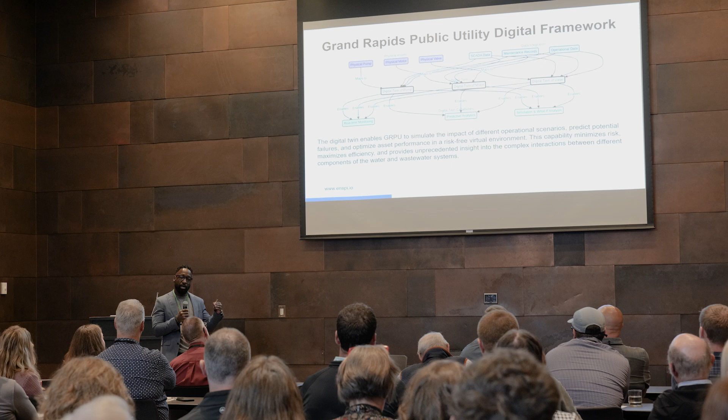So to talk about the opportunity that Grid Catalyst has provided us in piloting with Grand Rapids: the objective of the pilot is to really digitize their water and wastewater operations. They would like to run simulations in a virtual environment without interfering with their physical and live environments.

So our pilot is right now going through all of their different control systems. Through integrating those different control systems and putting that within our platform, it allows us to start analyzing their information to understand where they can reduce costs, how they can reach operational excellence, and how they can actually focus on using data effectively in the future.

One of the big challenges across utilities and municipalities is the ability to actually integrate and collect this data. As we all know, there's no uniformity when it comes to these systems, especially a lot of these hard assets. Another thing is air-gapped environments.

So we've been able to get around that using multiple different techniques - one-way diodes where information is coming only one way out, deploying on-site historians that provide access for the organization to get that data in a secure way. A lot of our customers aren't looking at moving into cloud, so we really focus on integrating into SCADA systems. That is how we've been able to go around that rip and replace model, and that is what we're essentially doing with Grand Rapids here.

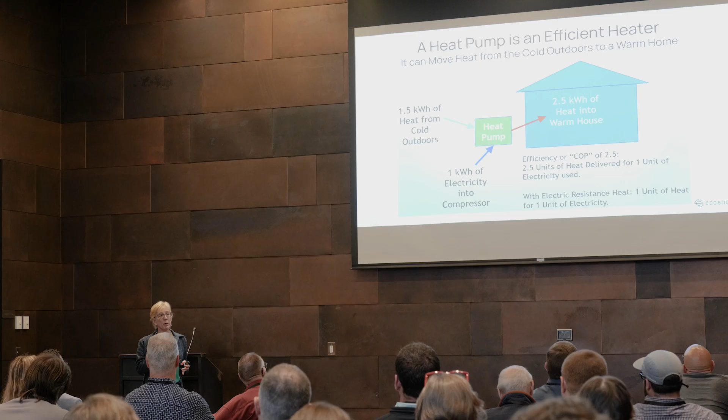The technology we're talking about today is air source heat pump, air to air. And I'm also talking about single zone ductless mini-split heat pumps. How many people know what that is?

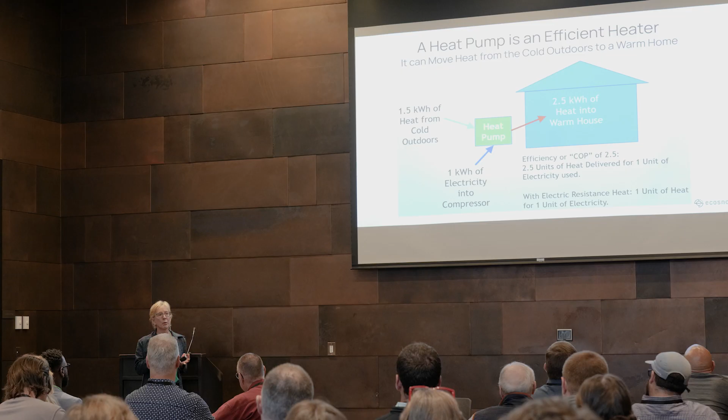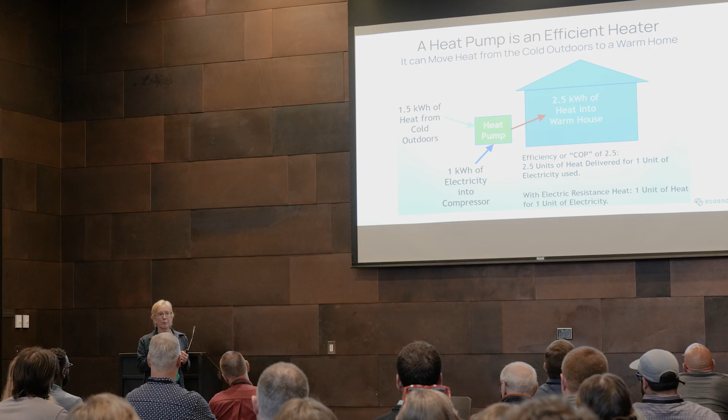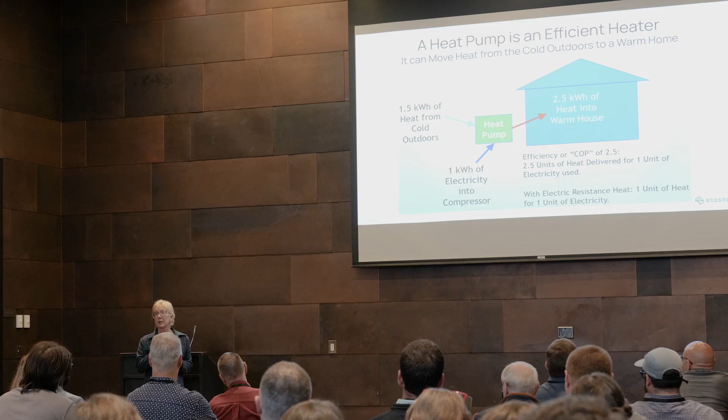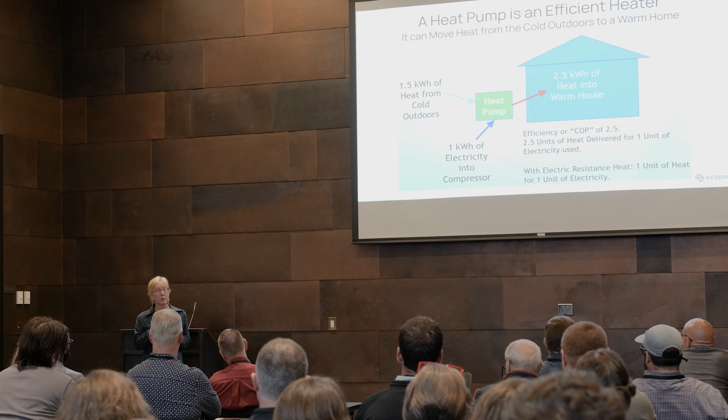So air to air, the source of the heat is the air outside, and it's delivering to a single point of delivery of heat and cold. You all know heat pumps can heat and cool as well. The other special thing that makes it important for Minnesota is in the last 10 years, the technology for residential heat pumps has dramatically improved, such that inverter-driven compressors can operate very efficiently down to really low temperatures. Ecosnap has done work with Fairbanks in Alaska with NREL and looked at performance all the way down to -20. Some Alaskans have looked at it, and the heat pumps don't even stop working down to -40 F. You might not like exactly what kind of performance you're getting at that level, maybe you're starting to draw more energy, but they will work, and they will work pretty efficiently down to some pretty cold temperatures. So that's all we're going to talk about heat pumps in general.

How do I change, Elizabeth? Is it this one? Is it this one? It's the arrow. Okay.

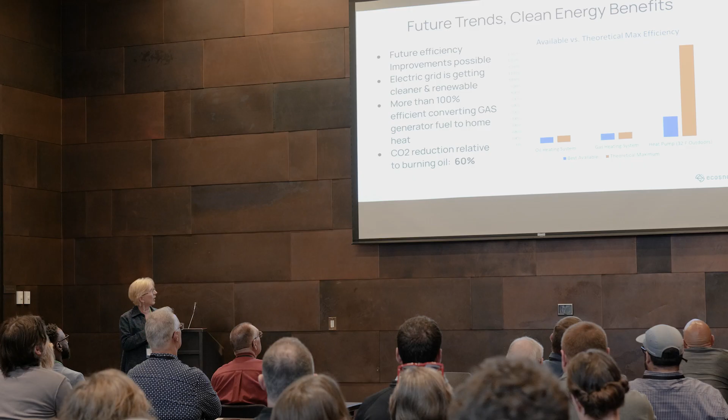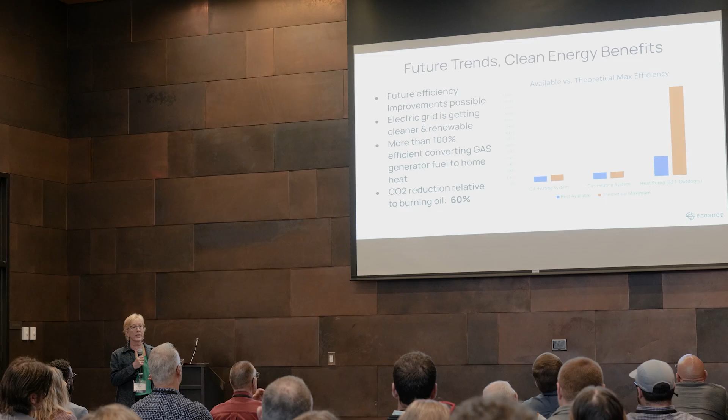This is always a startling look: we should not be burning gas or oil in our homes anymore for heating. The technologies exist. They're very mature for heating and then bonus cooling in most climates. And as Elizabeth pointed out, as the grid gets cleaner and cleaner, the emissions impact of using electric heating, and in particular heat pumps, gets better and better. So this is the right thing to do.

Now let me talk to you about Ecosnap. Ecosnap was born from my own anger. I asked for a quote from a local HVAC person for my home office for a mini split heat pump, and they said $8,000. This is in Colorado. And then I asked for a quote for a duplex I own, and someone said $10,000. And I said, you know, I'm just talking about one piece of equipment, right? And that's the reality in many parts of the country. So I dug into what's the problem.

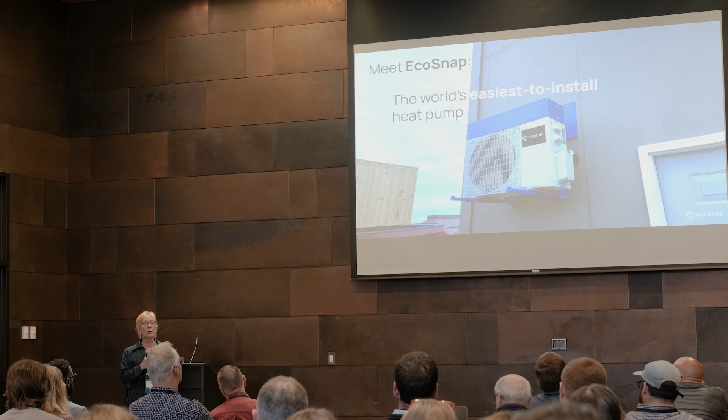And it's really very much a technical and a market problem. Market is uncomfortableness with new technology. But on top of that is that there's a complicated evacuation, charging, and line set running step to putting in a heat pump. And so we set out with clever engineering. We're not reinventing the wheel here, we're not doing rocket science. We're just employing clever engineering to remove some of those bottlenecks. And that's what EcoSnap is all about.

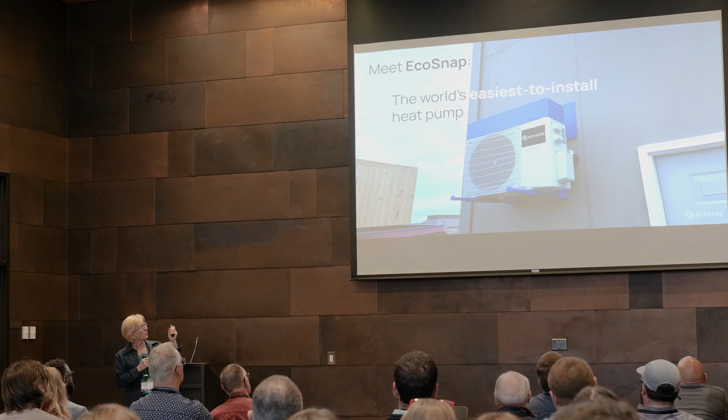There's one of our very early prototypes in partnership with Oak Ridge National Lab. The blue was my idea. Everybody wants gray, so I was overruled.

Here's what I just touched on: labor in the field counts for the vast majority of the price of a heat pump. And that's true for central heat pumps, and it's true for ductless mini splits. So I got to looking at that, and I created a stack chart, and I found out the evacuation and charge and running of line set, and we said, how can we tackle this? You can actually get a heat pump out of China for a number that would shock you all, and you would be upset to know that you can get a heat pump for like $250 out of China. So why does it cost me $8,000 when I go to get one in my office?

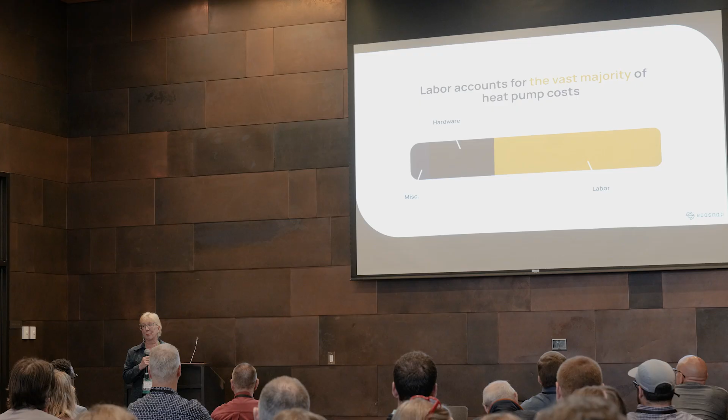So enter EcoSnap. We have a product that enables faster, more profitable installation, and this can benefit either the homeowner and the HVAC installer if they choose to use an HVAC installer. Faster, more reliable, and cheaper installations is what we enable. We reduce install time by 80%, based on compared to traditional install. Fewer callbacks because our system is more leak-proof, so you're not going to end up with climate-changing emissions going into the atmosphere, and in a more immediate sense, something that impacts the performance of the heat pump once it's in the homeowner's home. So there's more opportunities - potentially handymen can install these, or handy homeowners. The feature that I'm going to touch on in the next slide is we have also engineered it so that it will run on 115 volts, and so it would be plug-inable, so you can put it into an outlet on the inside. That's not the only embodiment of Ecosnap, but it's an important one for smaller homes.

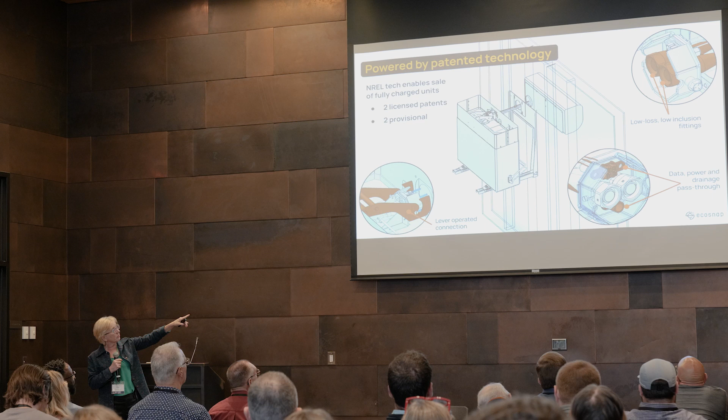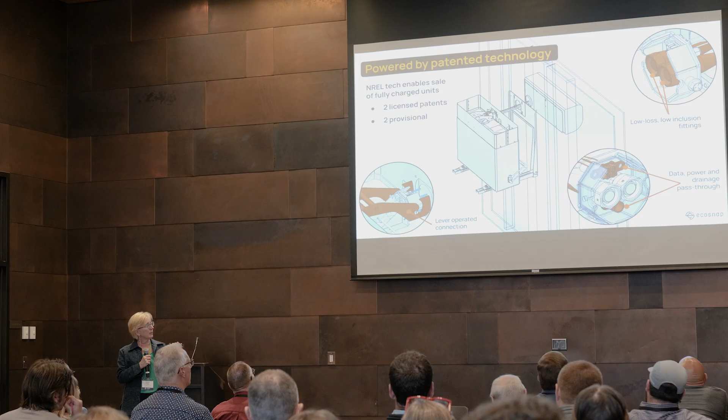Here's what the technology looks like. First of all, it's based on 2 licensed patents out of NREL, funded by the Department of Energy. We have an exclusive license on that. You can see there the air handler on the right, the exterior wall, and then the outside unit is mounted on a bracket on the outside with this connection between the two. These low-loss refrigerant fittings, which can be seen here, come together with a snap - so Ecosnap. And a lever connects all the functions: the data, the power, the condensate, and the refrigerant lines are all connected by a single throw of a lever. That's the magic of it. And again, it's not magic, it's not rocket science, it's simply very beautifully engineered. We're trying to, and I believe have succeeded in, foolproofing the installation and bringing it down to just a few minutes, less than an hour.

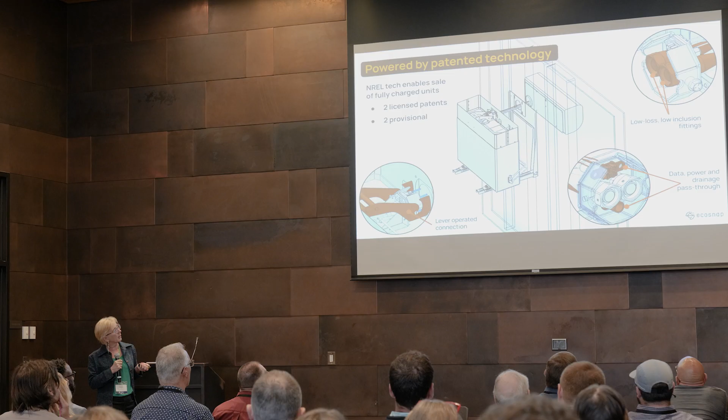What else do I want to say about that? Oh, I think that's good, we'll move on.

Here's our history. We built the MVP based on a laboratory research scientist version and made it practical, manufacturable, and cost effective. We've been supported by your own Grid Catalyst program, and we're grateful for the relationship we've developed with Precipitate. We've also partnered with NREL, Oak Ridge, and the Launch Alaska team in Alaska, which lets us show if it can work in Alaska, it can probably work in Minnesota as well.

We've demonstrated the technology in 5 different climate zones. We've had homeowners install them, GCs install them, and HVAC technicians. Everybody's giving us feedback, and with every single install we get a little bit more information and tweak it to make it IKEA-like. This is going to be so easy for you, you don't even have to think about it.

I want to address a question that comes up a lot. I looked at the design temperature in Minneapolis, around 0, and pulled up the specs here. An important thing about Ecosnap is we're an installation technology, so any performance that is available can be available through Ecosnap. But what we currently have is the performance shown here: the coefficient of performance at minus 13F is 1.55, and at 5F it's 2.51. So the performance at your design temperature is somewhere between 2.5 and 1.5.

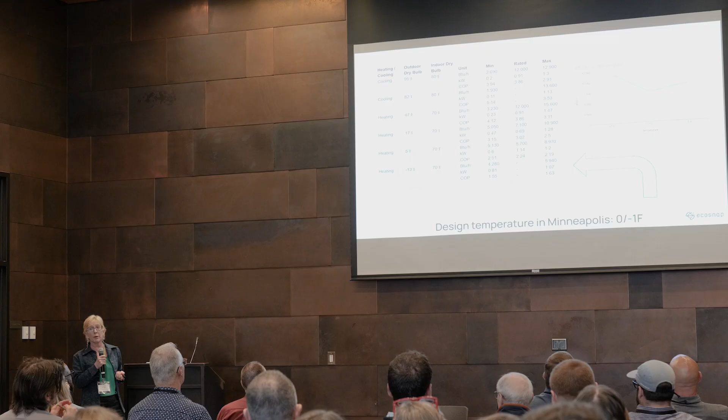And then back to you, Elizabeth.

Great, thank you. So let me tell you why I really love this technology for this application. This first floor space, one is Lala Ice Cream, and next door, just opened last week, is Thesis Coffee Company, so please support them. They're in an all-electric building, and it's going to be really energy efficient.

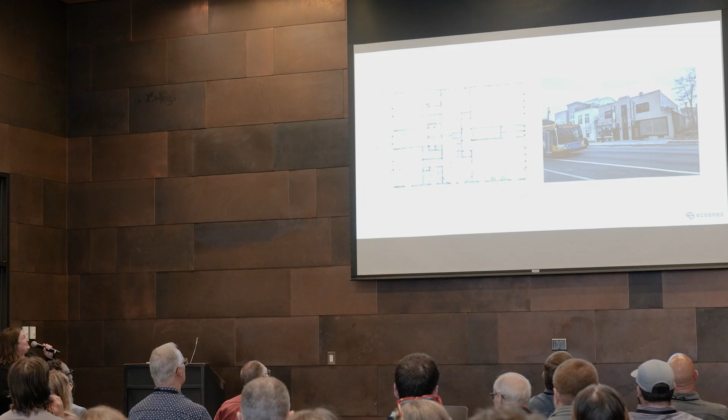But the upstairs units have large commercial systems that are all-electric with lots of ventilation and energy recovery. The upstairs units used to be single-family homes. I love this photo because this is a 1931 drawing, and they just have an electric fireplace. This is one of the locations we're going to put this new Ecosnap unit for heat and cooling.

I think it's really important to think about the economics of reusing buildings. It doesn't necessarily make sense, it's less expensive to get to all electric when you're building new than it is with renovations. However, embodied carbon is a really important part of this.

And the other piece is just that our old buildings are beautiful and we love them and we want them in our urban fabric. So this is right on Hennepin Avenue, and it has a historic Art Deco storefront, and we're going to preserve that.

I also really wanted to preserve this interior. There are some historic plaster friezes up there. I didn't want to put a lot of ductwork in there. I also didn't want to disrupt the tenants, because when you disrupt tenants, you're not earning rent for that time, so that's another part of the economic equation.

And I wanted it to be all electric and move away from fossil gas in a way that's still affordable to operate, so heat pump technology lets us do that. Some challenges we've seen: in purple here, this is where the Ecosnap units are going to go, 4 of them.

May I add one thing? We've had a lot of interest in our product for residential spaces - workshops, 3rd bedrooms, small dwellings, accessory dwelling units. I'm so grateful for this opportunity to partner with Precipitate because it allows us to demonstrate in light commercial, which is also a big application. And like Elizabeth said, the ability to monitor and demonstrate how much the resistance heat is used is going to be really great for future projects for everyone in this area.

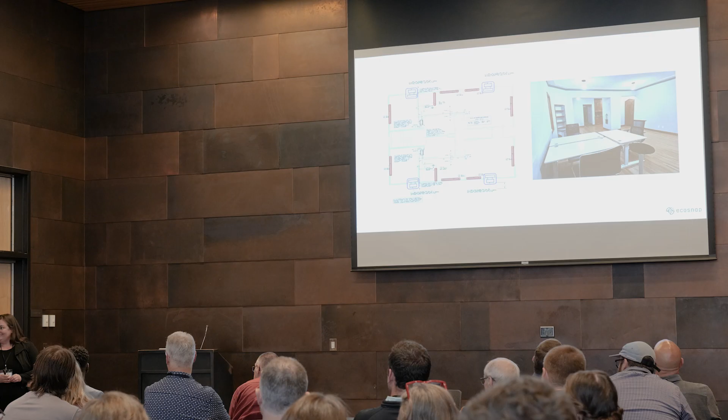Thanks, Elizabeth. Can you talk a little bit more about regulatory challenges, particularly with new technology? Yeah, I think it's regulatory, but it's also that we're in a building industry that's a liability-heavy profession. So even if something might get past regulatory, if I use my engineering license to say to the city this is going to pass, and there's a complaint, what does that do to my reputation? So those two things are really tied together.

So I think the biggest hurdle from the city has been the requirement for ventilation to happen at the same time as a heat pump replacement, because there was no ventilation in here - not even a bathroom exhaust fan. The exhaust is opening a window.

So how does your ventilation system work? So we were going to do a Lunos kind of through-wall system, which is kind of cool. That was a regulatory hurdle - they kept asking questions and questions about it. Meanwhile, we don't have any heat in the building. So we decided, okay, we're going to do a typical energy recovery ventilation system.

You can see it here, it's located in this closet. So I kept the duct really small here, so we'd only have to build one soffit and then build down this hallway a little bit, and it'll exhaust from the bedroom and supply to the other room. So very typical ERV, but the energy recovery ventilation is really important to making this work too.